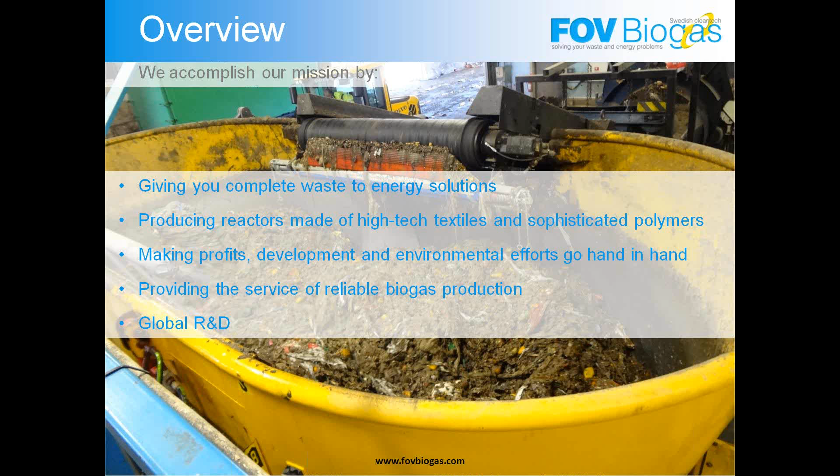One other thing that comes with our package is that we are, together with the University of Borås, also running a global R&D. I'll talk more about that later on in my presentation.

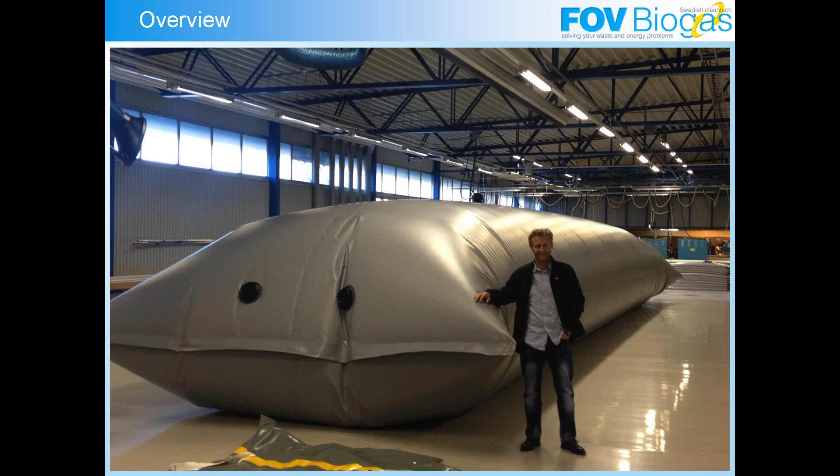Here you can see one of our bigger reactors. It's me in the picture. We have three categories of products. We have these bigger reactors that go from 500 cubic meters upwards to a couple of thousand cubic meters. Then we have the mid-size ones, somewhere from 20 to 500 cubic meters, and then we have very small ones from 2 to 50 cubic meters, mainly for households, that you can see in this picture.

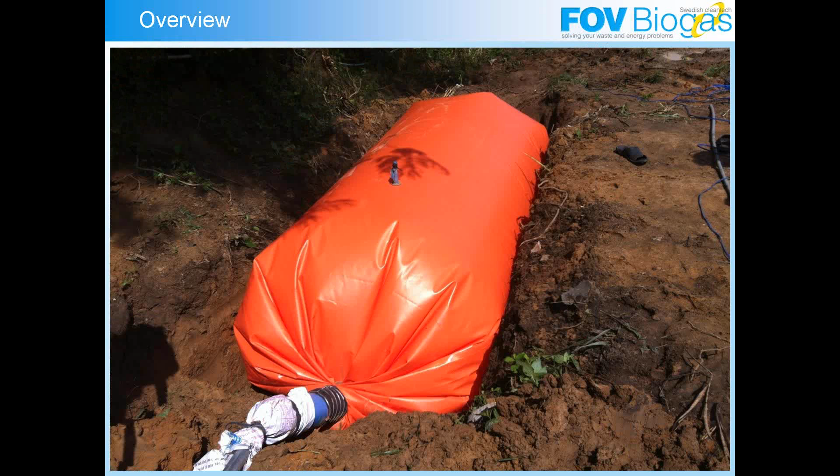Our system, or our concept, is based on four fundamentals. One is to provide the highest quality, a quality that is reliable, that will continuously make you produce biogas.

This is then supported by local support, what we call superior support. We also have a unique scalability which enables you to test things and then scale it up in a very easy way. Combining all of these three factors will give you a very cost-effective solution at the end of the day. At the bottom of this slide there is an animation, and I will not show it this time.

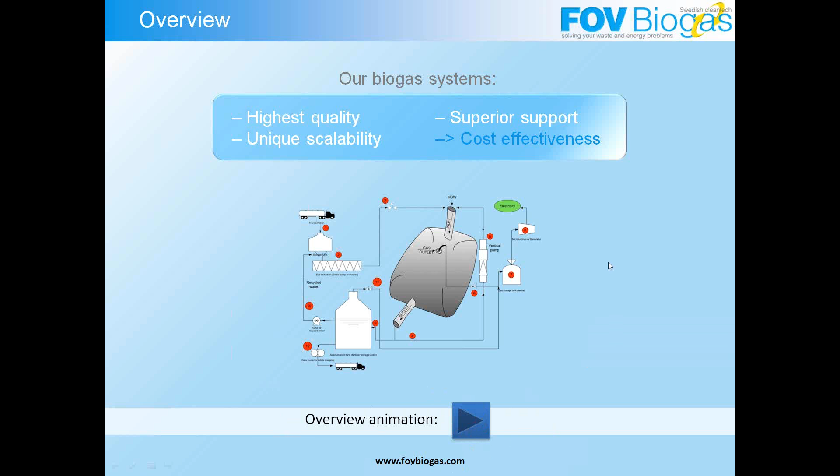You can find that on our website. It's a film which shows fairly well what it is that we do and how we do things.

Highest quality, what is it that we mean by this? As I've said before, we have developed a very special textile material for the purpose of producing biogas, and this gives us, in comparison to traditional systems, some benefits.

The material in itself is very lightweight and flexible. At the same time, it's also very durable and very strong. That enables us to build very large systems. And because it's made out of a textile material, we can customize it even though we are using industrial processes with industrial quality and industrial standards.

This, of course, makes it possible for us to have different sizes and to assist in easy scale-ups. And also, which is always maybe most important to us, it needs to be very cost-effective. It needs to be a good investment for the customer.

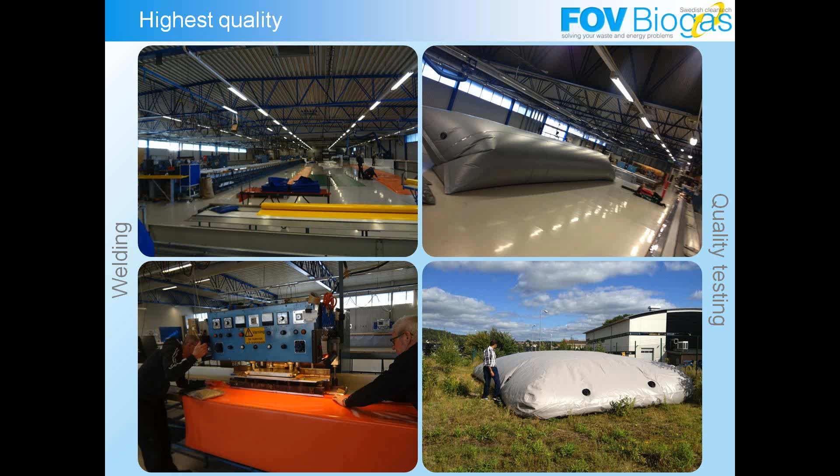Here are some pictures from our production. The top left one is from where we do the welding of the material. The top right one is the testing procedure where we make sure that there are no leakages and that everything is correct before we ship it. Bottom left is mainly how we weld it together, and in the fourth picture we continuously do field test and prototype testing of everything that we do.

This is the way our system arrives, and this package in particular is a 100 cubic meter reactor. As you can see, it's foldable and also very lightweight. This one weighs, I think, roughly 75 kilos, and this in turn makes it very easy to distribute, easy to store, and easy to take back, and you can actually resell it.

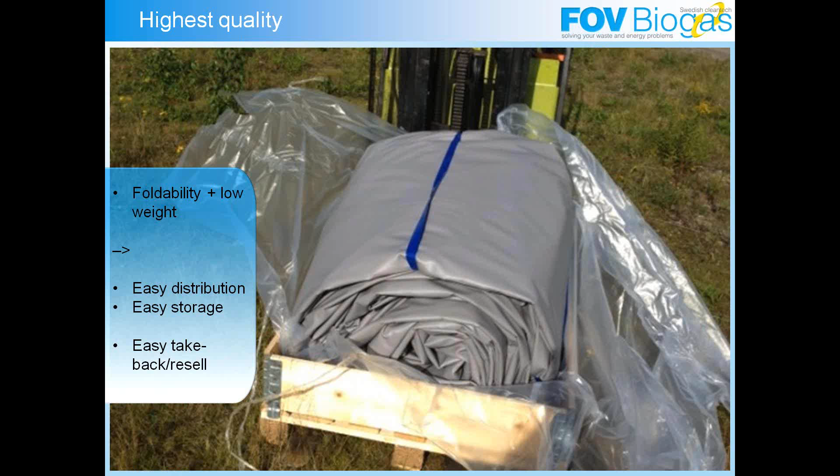Why we put that in is that it also makes it possible to get it funded by banks, because it's an asset that you can take back. So it is possible that if it doesn't work, or if it's not to the purpose, or if it's not being paid for, then it can always be taken back, and that is a big advantage actually.

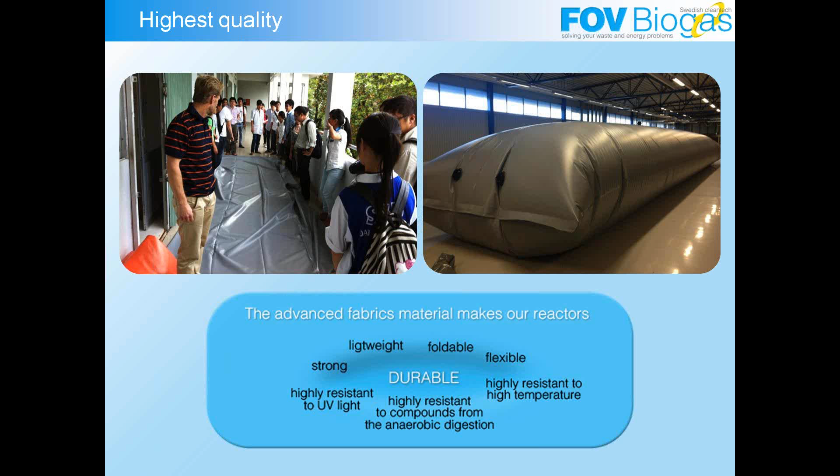What this material is made of gives us these advantages over traditional systems: it is very strong, lightweight, foldable and flexible, yet highly resistant to high temperatures. It resists chemical or biogas atmospheric conditions, and it's highly UV resistant. So that is the material.

Regarding our superior support package, wherever we establish ourselves in each market, we do this through universities, research institutes, and local distributors and sales agents that we train. Together with the research institutes and universities, we start local research. That means we can assist you with business cases, installations, optimize the process, help with maintenance, and help to scale up.

Also included in this investment is that we are local, so we're not far away. We can come to your place very quickly and help you very quickly. We are not a far-away person, which is expensive, who needs to travel a long distance before they arrive. That's not the case. We will also train your own personnel, and give all kinds of assistance needed to have a stable and reliable biogas production.

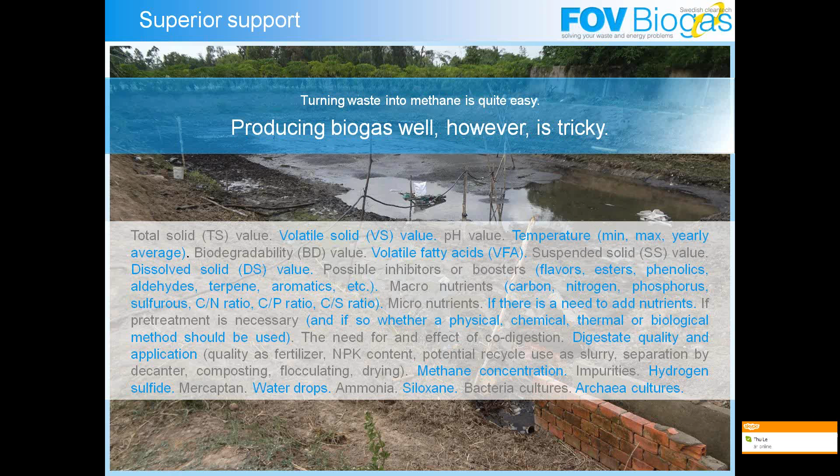This slide mentions a number of areas that are important to be in control of. Most of our customers are not biogas production experts - that's not their core business - so it's a lot to ask them to have knowledge of all these things. But we have that, and we can support and help you, so you will have reliable production of biogas at all times.

Here is a schematic picture of how a system works. You have organic waste that goes in, and a mixing tank where you prepare your substrate before it goes into the reactor. Then it goes into the reactor, where it stays anywhere from 20 to 50 days, depending on substrate, temperature, and different conditions.

Out of this you get your biogas, which can be used directly for heating, cooking, gas lighting, or even sold at retail, or it can be converted into electricity, used for fuel cells, or compressed as biogas for vehicle fuel, where you need extra equipment to do this.

On the right you have the outlet - after about 30 days it comes out, and there are different things that can be done with it, but mainly it's used as fertilizer, either by yourself or sold to someone else who needs it.

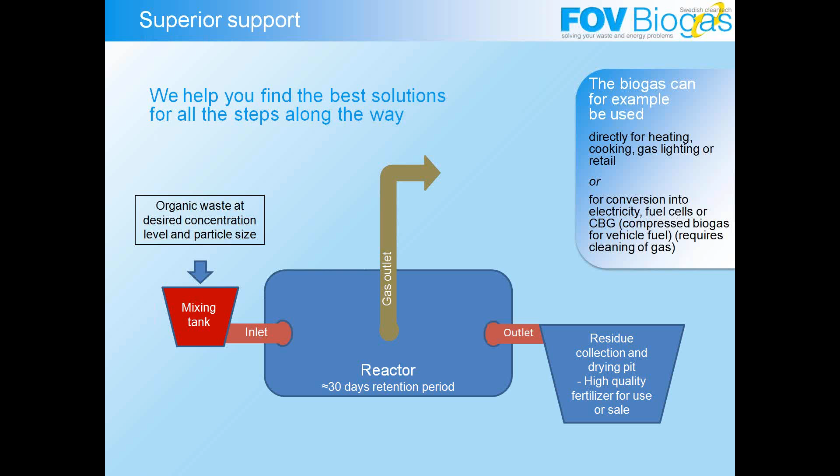The unique scalability concept enables a number of things. You can start very small to reduce risk - maybe you're uncertain whether biogas will work in your organization, or whether your substrate or organic waste will really produce. If there's big uncertainty, there's no need for a full-scale implementation, which is traditionally the way it's done for cost reasons. Instead we can offer a 3 to 6 month demonstration where we can prove the concept.

After this, if you're satisfied, we can move to full implementation, at a pace where we do it step by step - we don't need to do it all at once. We could just connect one more reactor or replace one, and this is done very easily and very quickly.

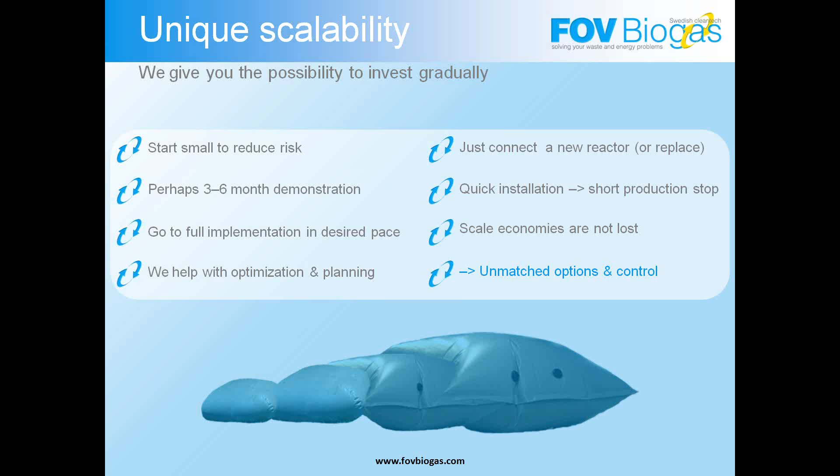I've said it several times, when it comes to the installation of it, it's done very quickly. There is a bit of ground preparation that is needed. Then we install the systems in a day or a couple of days, depending on the complexity and the specific situation. But anything from a day to a week's time is normally the time for installing it.

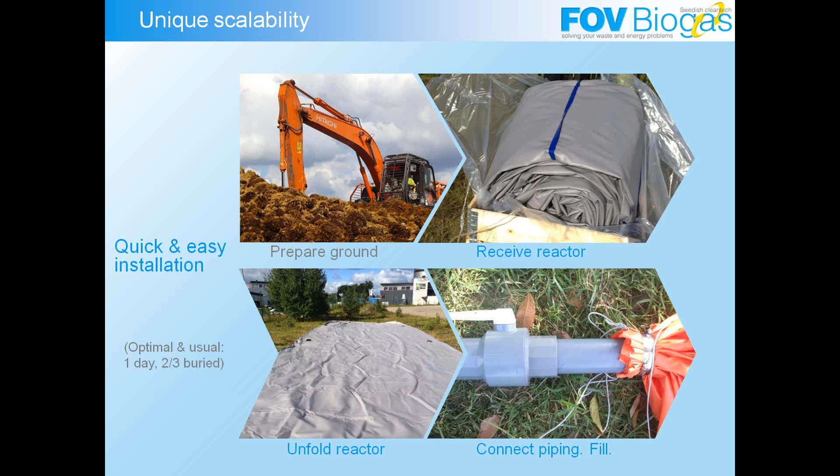A typical demonstration installation that we can offer is quite often a 100 cubic meter reactor. The time needed to do the evaluation also depends a bit on the situation, what it can be used for as inoculum, for instance. So it depends on how quickly you can get the biogas process going, but in 3 to 6 months you get a very good understanding of it. We then do a thorough evaluation, and you can have an informed full-scale implementation.

By this we mean it is your conditions, your substrate, your situation that is being analyzed, and it's that data that goes into the full implementation calculation. So most of the risks are taken out. And this is totally unique in the industry. This cannot be offered by anyone else or any other technology than ours.

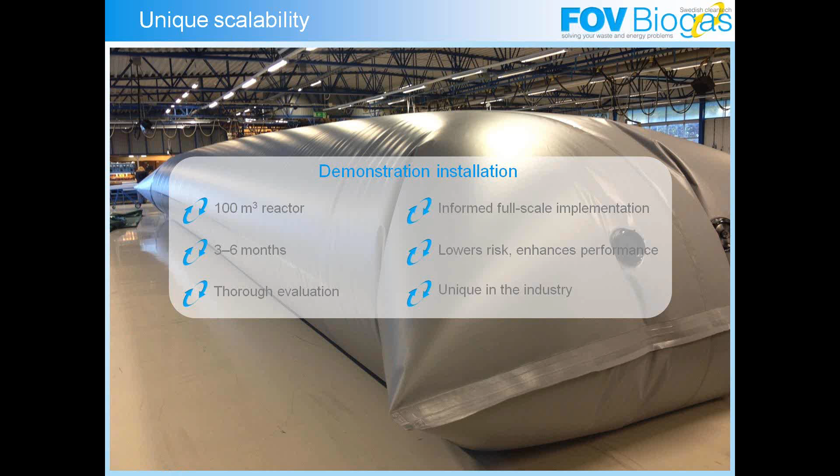Reliable investments for reactors. I mentioned the different sizes. Installation is 1 day to a couple of days. Lifetime of the reactors is more than 10 years. Payback time should be less than 5 years, all depending on different market conditions and situations, also for the customer themselves, how they want to progress and for what they want to use the biogas that's being produced. But it should be lower than 5 years. Typical is roughly 1 to 2 years, maybe in some cases 3, but normally 1 to 2 years is the payback time.

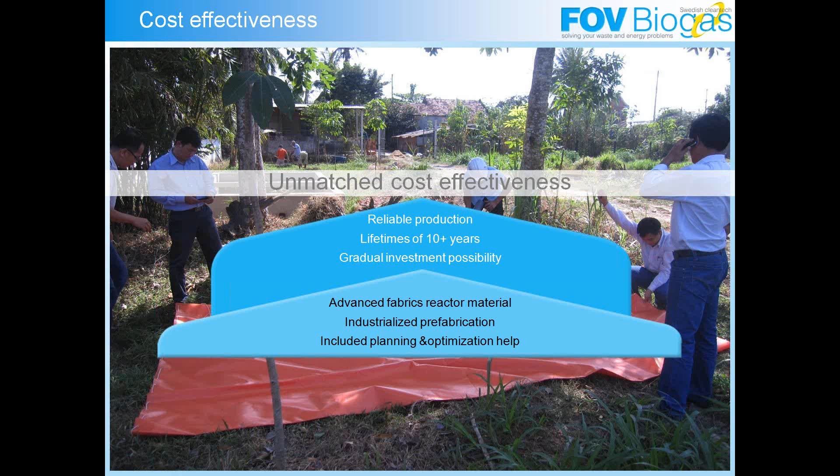Summarizing this cost effectiveness: it's a reliable production based on highest quality and superior support, lifetime of well over 10 years. And you can do your investments gradually. That we see as a major advantage, at least if there is very little experience in the field of biogas and if the uncertainty is big with the customer.

Customers and different waste types to the ones that we are supplying this for: Agriculture is of course one sector which is big. Industries is another one. Marketplace, fruit markets, meat markets, and so forth is a third one. Eateries, with that we mean restaurants, cafes, food courts, canteens, hawker centers. In all honesty, the main area has been canteens and also household. We haven't done any for restaurants yet.

Housing, there we have different things. Campuses, different universities for instance. Public toilets is also an area where we have done tests. And then, of course, governments. We want to work on national and regional distribution programs, both for small reactors, which is typically the most common one, where there are different national programs on implementation for household reactors and small farms. But we are also interested in and working together with municipalities to handle their organic waste and wastewater treatment.

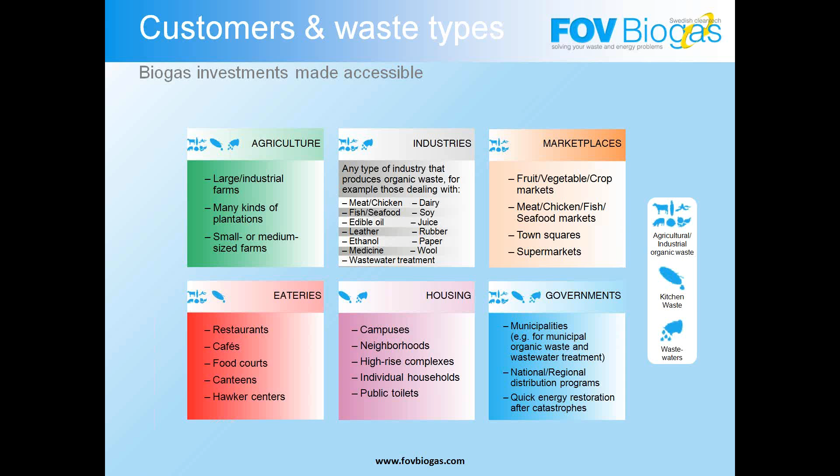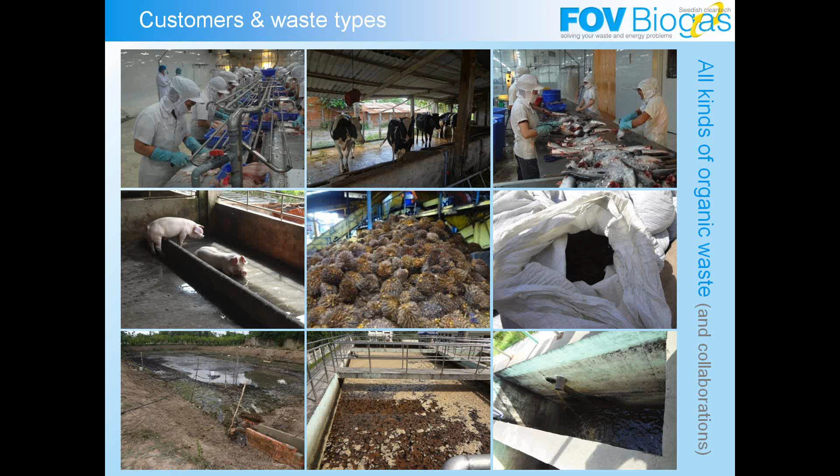Left is wastewater. All the bottom ones are different wastewater from different industries. I think the left one is from the fishing industry, the middle one is the tobacco, and the right one is from a rubber industry. One other interesting one is leather tannery, which we're currently doing in Indonesia, for instance.

Also a little bit special is the smallest product that we sell, the household reactor, and then we have a do-it-yourself kit. I just chose to show a slide on that. There is more information on that in particular on our website.

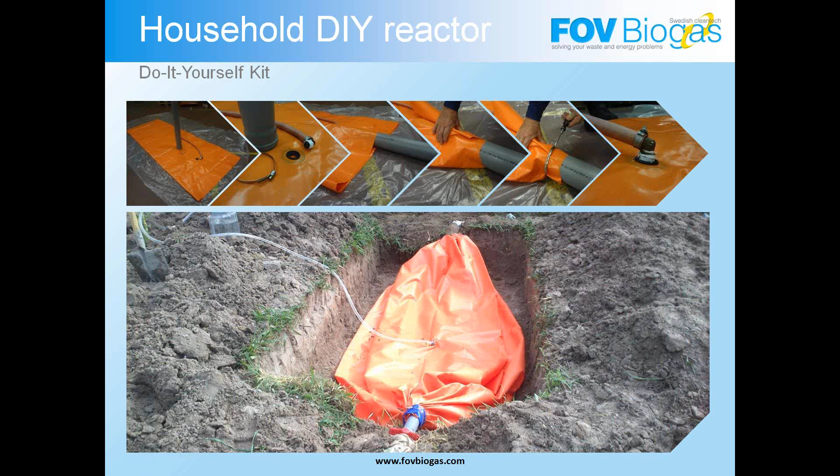Here is a business case where you can see it's less than a 2-year payback time on this. This is a typical digester of 3 cubic meters for a household, producing 1 to 2 cubic meters of biogas per day, enough to do cooking for one household, and also maybe have some lighting. I think this LPG cost per month is calculated on Vietnamese costs and prices, for the Vietnamese market.

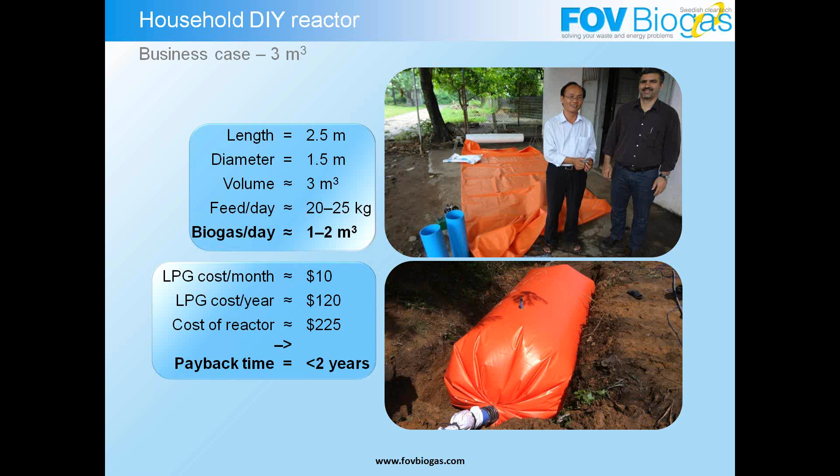Startup procedure, here we have as an example, and this grows depending on whether it's an industrial installation or a household. There is a startup procedure where, if you don't have access to substrate which is already producing biogas, you need to start from somewhere. One way is to use cow manure, mixing 50% cow manure and 50% water, more or less. Then you have 20 to 30 days before the process itself starts building up, and you start gradually feeding in your organic waste until you reach the maximum that should be fed every day. Then you're up and running in anything from 40 to 60 days if starting from scratch.

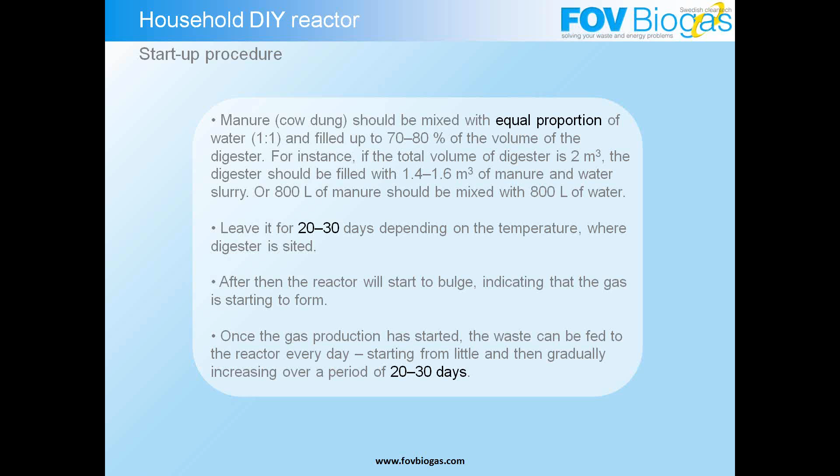If you can get hold of substrate where the process is already working, then of course it's much quicker than that. Global R&D - our objective is to become the most competent and the most knowledgeable biogas company in the world.

The kind of research being done is on different substrates. You have seen a number of different areas where we're already operating, and maybe it's of no interest, but there are also substrates that come to us where there is a big question mark whether this is suitable for biogas production or not. Then we can run this locally and see whether it works, and they get assistance from the University of Borås, and that works very well.

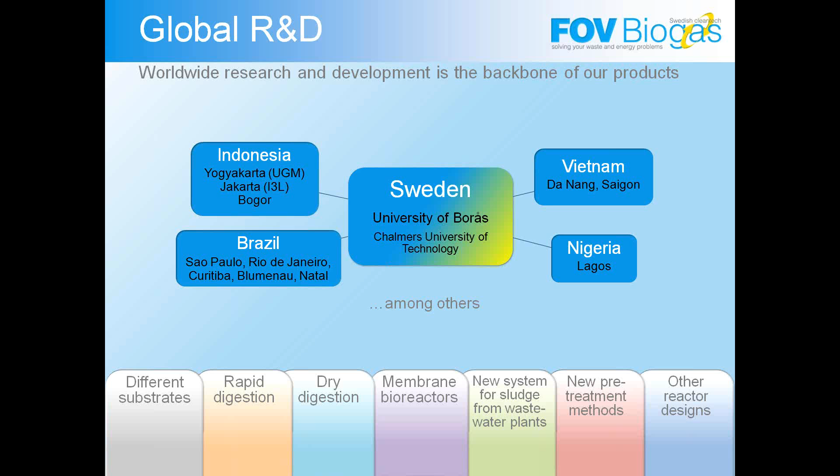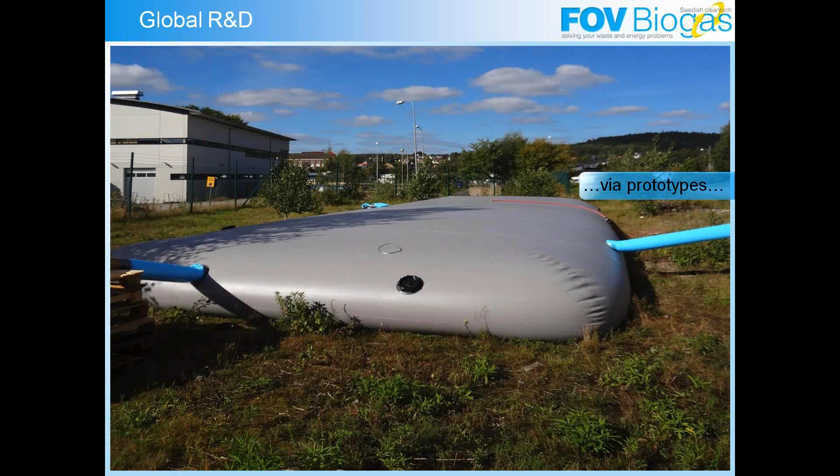So why invest in our systems if we can compare them a little bit to traditional biogas systems? Our system is very durable and flexible, gives a reliable production compared to traditional systems that quite often have low production due to poor quality, leakage, other things, or maybe no production because of lack of competence. Something goes wrong in the process at one stage, no one knows what to do, and therefore it just stops. With our support, that should not happen.

We have unique scalability where we can gradually expand the system based on your or the customer's production data. This is in comparison to a traditional system, where you need to go to a full implementation day one, normally for cost reasons, and then you have a lot of uncertainties.

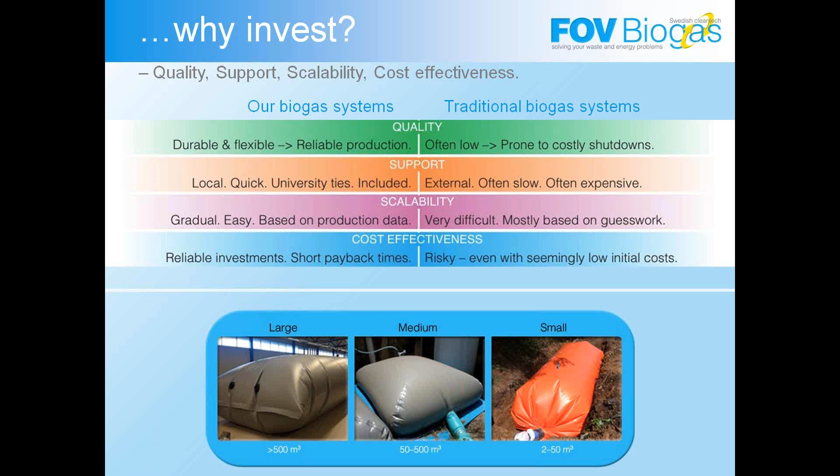A little bit about FOV Biogas, our legacy. FOV Biogas's mother company is FOV Fabrics, a textile manufacturer, and we manufacture high-tech textile materials. We have done this for 50 years.

Our most known innovation so far is the fabric for airbags, which was developed by us quite some time ago. To mention some of our customers, we're leading well-known global textile company, Gore-Tex, Prada, Louis Vuitton, Burberry, Puma, Formula One buys our materials, also Autoliv, Volvo, BMW, Scania, Veolia, Statoil, City of London. That is just to mention a few of FOV Fabrics's customers.

We are a vertically integrated company, which means we control and monitor all aspects of production, from warping, weaving, dyeing, coating, and so forth, to a finished product. And then we have extensive testing and quality control on everything that we do. So that is the background of FOV Biogas.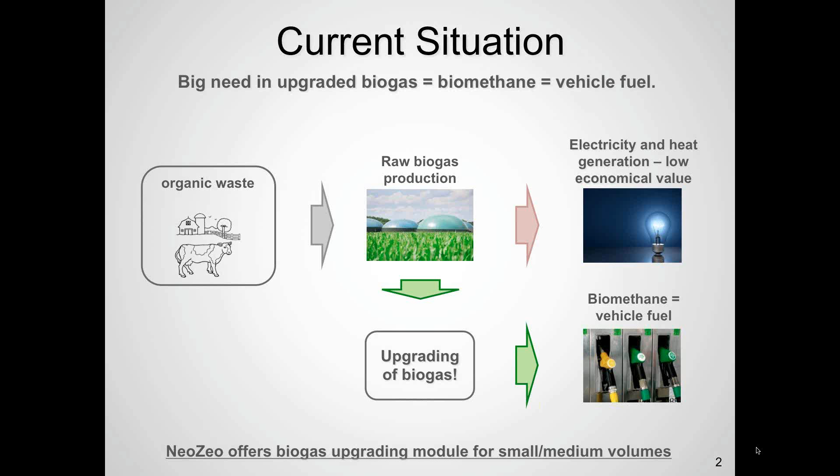And NeoZeo, as I said before, you could see on that slide, collecting raw biogas and pumping it inside of a container, a box, which removes different components, removes carbon dioxide, hydrogen sulfide, which is H2S, and water. Then that upgraded and purified biogas, which is called biomethane, is compressed to 250 bar.

The biomethane at 250 bar can be fueled to different types of vehicles, like cars, buses, trucks, and tractors. And our focus is on scale from 50 to 200 cubic meters per hour. That means that a normal farm in Sweden and Germany can produce exactly that amount of raw gas. And our company is focusing on converting that particular flow of raw gas to vehicle fuel.

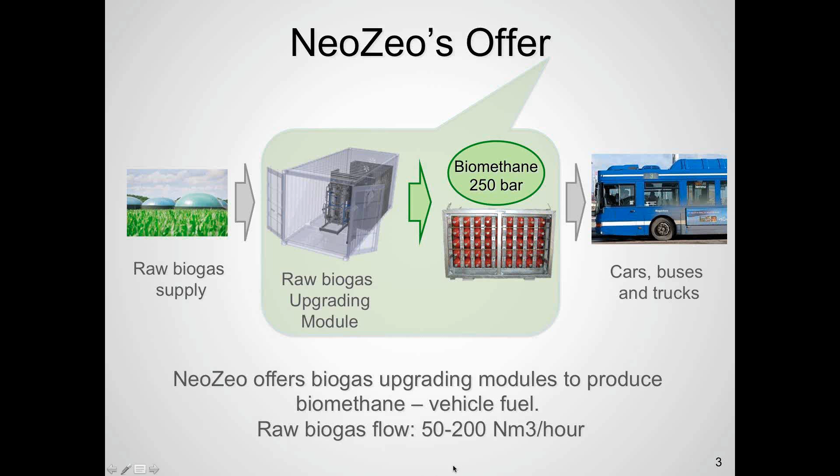Next slide. Here I would like to compare what it means to produce electricity and what it means to produce vehicle fuel. You can see at the top, I'm trying to convert 2 cubic meters of raw gas, which is produced by a farmer, for example, and then we use the module offered by NeoZeo. We can produce 1.2 cubic meters of biomethane. That 1.2 cubic meters of biomethane is equivalent to 1.32 liters of gasoline.

Well, I'm not completely aware of the price of gasoline in India, but you can easily calculate what would be the revenue for a farmer or for a producer of raw gas to sell or utilize that 1.32 liters of gasoline. Well, the second scenario is where you convert 2 cubic meters of raw gas to electricity. Then usually maximum you can produce 4.2 kilowatt-hours of electrical energy using 2 cubic meters of raw biogas. Again, knowing the prices of electricity and gasoline in India, you can easily compare these two values, and I believe you will see a big advantage to producing vehicle fuel from raw gas.

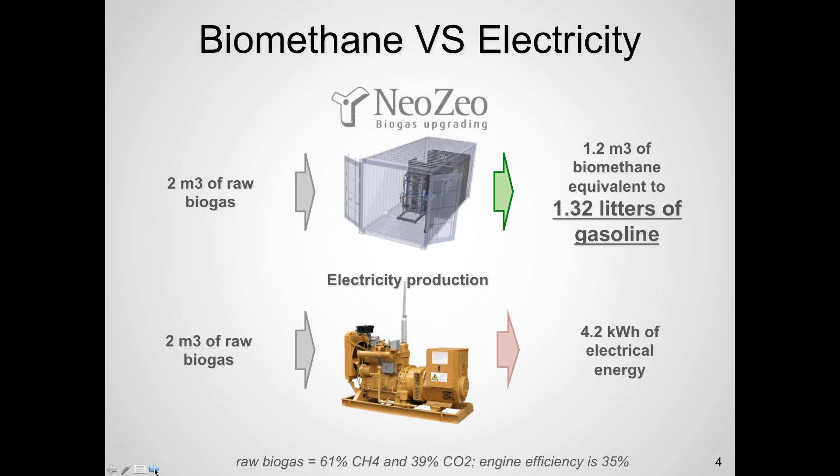Our module, which is a biogas upgrading module, consists of several parts. One part, which is the heart of the module, is called the pressure swing adsorption unit. On the left side, you can see two columns which are filled with adsorbent, which is shown in the middle of the slide. That adsorbent is the know-how and patented technology of NeoZeo.

In our company NeoZeo, we are focusing on research and development of different types of adsorbent with specific properties for separation of carbon dioxide and methane. We developed a volume-efficient adsorbent which can efficiently separate carbon dioxide from methane. The adsorbent is structured and placed inside of the columns.

That unit is then placed inside a container and connected to other units, for example, pressure compressors to compress raw gas, filters, coolers, and units to separate water and hydrogen sulfide. All these components are inside a container, which you can see on the right side.

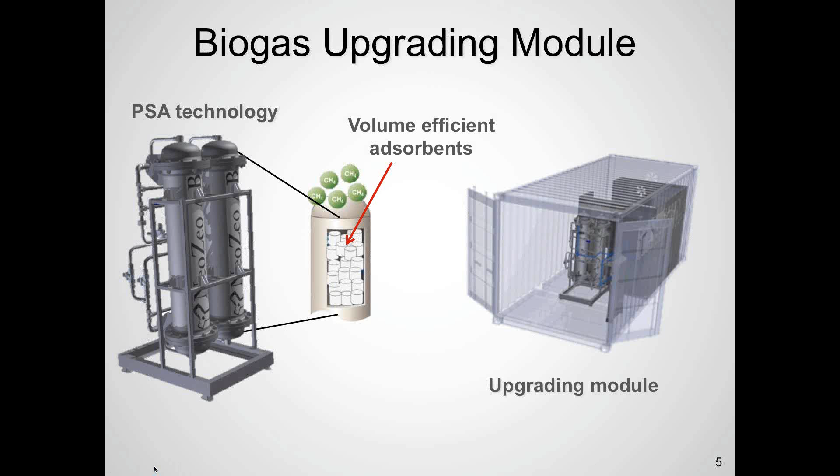Here I just would like to describe a little bit more about the core technology. As I said, it's called pressure swing adsorption technology, abbreviated PSA technology. We pressurize raw gas, which is mainly a mixture of carbon dioxide and methane, and push it through one of the two columns.

Then CO2 gradually would adsorb inside the column and gradually fill it up with carbon dioxide, because the adsorbent placed inside the column has a particular property to capture CO2. At the same time, methane is not captured, but goes through the column and is collected as a product inside a third vessel.

When the column is full of carbon dioxide, and we know about that based on our optimized conditions and how long it would take to fill up a particular column filled with adsorbent, we close the column and push the same gas through the second column. This means the process is continuous.

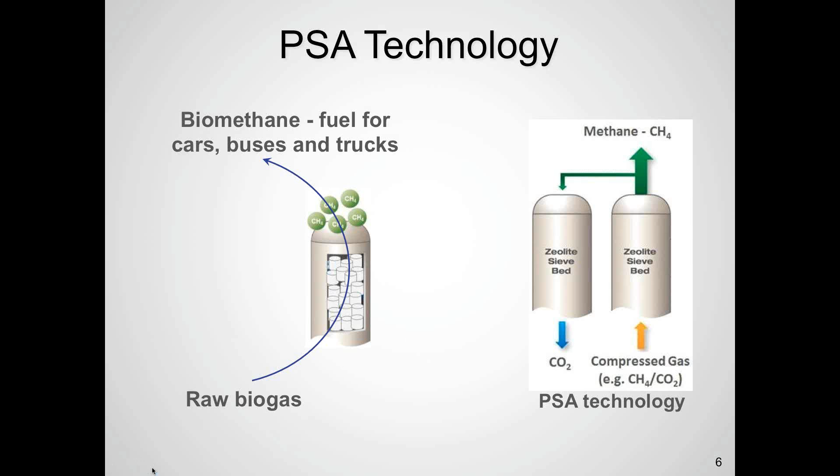Shortly, on that slide you can see advantages for producers of raw gas and for potential distributors of biomethane. Typically these two companies or persons are different in Germany and Sweden. It may be one person who is both producer and distributor, but let's look through the points.

For producers of raw gas, they can get extra profit compared to production of electricity, which I showed before on my previous slide. They can use biomethane, which is the product after cleaning raw gas, for their own use, meaning they can fuel their own cars, or fuel local trucks, for example, for distribution of milk, vegetables, and other local products.

Also, they would get a better environmental advantage. Again, there can be local support from a government.

For distributors, again it can be the same advantages as for the producer, meaning advantage for the main supplier of raw gas. Additional advantages are reduction of transportation cost, meaning you don't need to get and transport vehicle fuels to your vehicles which you are using locally. If your city is remote or even separated from the main big harbors where fuels come from, you can easily establish your local fuel production and be independent from global suppliers.

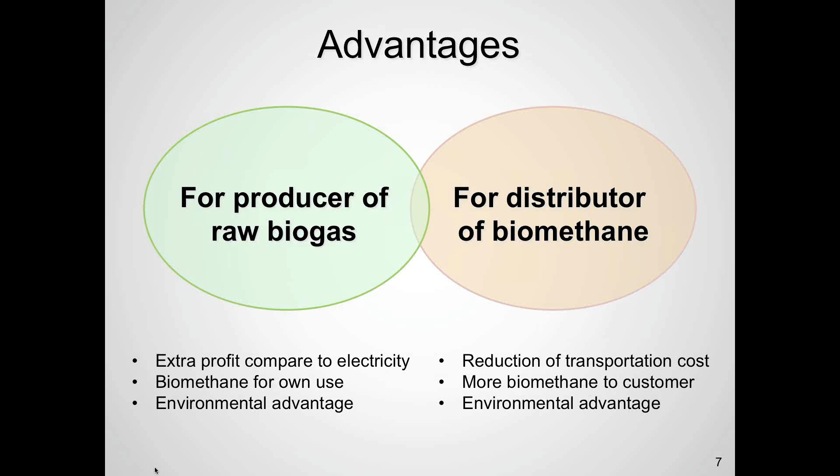Before we proceed, we need to know details of your production and composition of your raw gas, and what's your business model, how to distribute the upgraded biogas, biomethane. Our company NeoZeo can help you at each stage, but here I would like to show some technical specifications you should consider before discussing it with us. In principle, what you need first is a raw biogas production facility.

You need to have raw biogas. That raw biogas needs to be dried and cleaned to remove hydrogen sulfide. Some raw biogas production facilities already have dryers and H2S filters, but some do not. If you already have production of raw gas, please investigate if you have dryers or H2S filters. If you don't, NeoZeo can definitely supply these items.

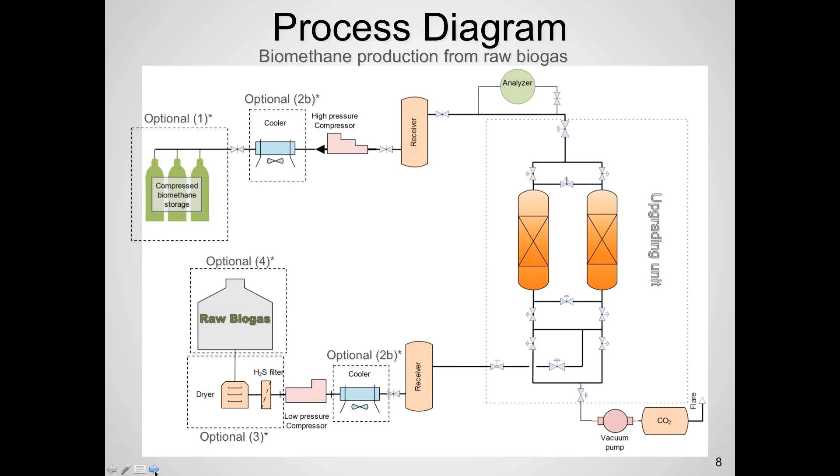A little bit more about the team. Myself, the photograph on the right, top right, I'm the CEO of NeoZeo. We also have an office in Latvia. Our board and research and development leaders are Lennart Bergström at Stockholm University and Niklas Hedin at Stockholm University. Also we have Thomas Arctaedius, who is focusing on business development and has successfully worked in 10 different companies.

We have research groups in two universities, one at Stockholm University, where we're continuously focusing on developing new and improved adsorbents for separation of carbon dioxide and methane. You can see Zoltan Bacsik, senior researcher, Ocean Cheng, researcher, and Panagiotis Krokidas, researcher focusing on modeling.

More or less, we are focusing not only on experimental, real experiments, but also on optimization and modeling of a real process using computers and programs like gPROMS.

And researchers at Riga Technical University are focusing more on research and development of the model itself, testing different parameters and testing new adsorbents for separation of carbon dioxide and methane. These researchers are Janis Rubulis, Kristine Rugele, and Janis Neilands.

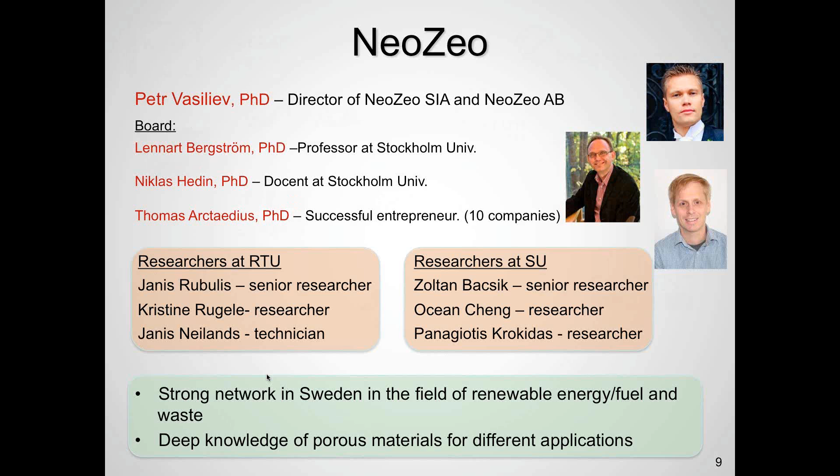Our company is supported by different agencies like the Vinnova Energy Agency, CEDAR and LEA, European Union organizations like ERAF and LifePlus, and we have cooperation with different companies.

For example, the Agricultural University in Sweden at Uppsala, Riga Technical University, Stockholm University's Excellence Center on Porous Materials. We are part of a big project called Biogas Expos, together with Vafab Miljö, a big producer of raw gas, and an Agricultural Institute in Sweden.

I would like to say thank you for listening, and welcome to ask me your questions.